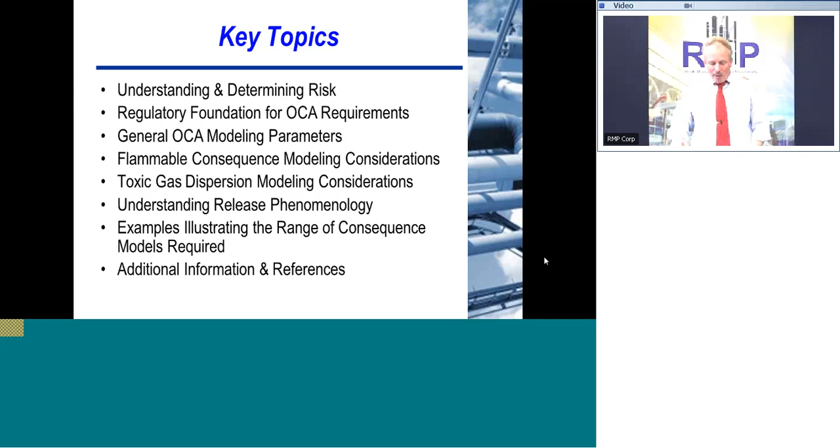Let's start by making sure we're all talking about the same thing when we discuss risk. Risk is really the product of probability and consequences. Likelihood by itself doesn't give you a complete picture. If something is very likely but relatively inconsequential, it's not that important to worry about. Something extremely high consequence but very unlikely may also not be that important to worry about. So it's by understanding both the likelihood of an undesired event and its consequences that we can understand risk and its overall importance in our lives and workplace.

When you're looking at engineered systems, you're really looking at a lot of different things that can happen for a complex process system. It's really the summation of all the individual probabilities and consequences for each of the undesired events that can occur.

One key concept to keep in mind is individual risk versus societal risk. Societal risk takes into account the number of people that may be affected by the event, whereas individual risk integrates the number of risks that an individual may be exposed to. Both concepts play a role in our understanding of risk and its quantification.

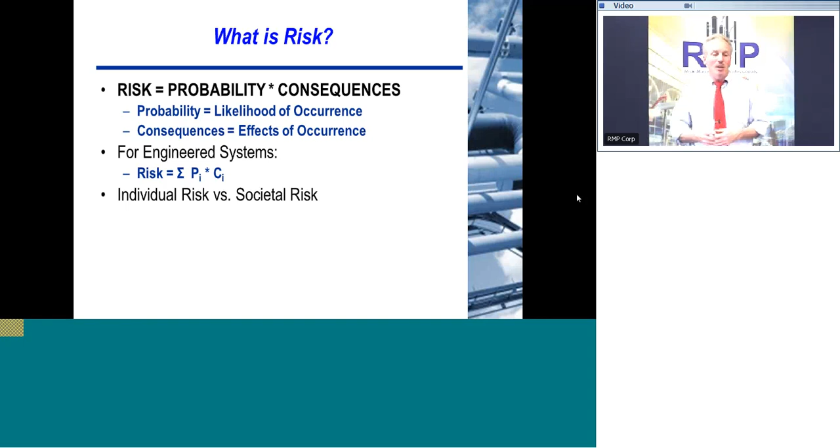Let's look at some different representations of risk. One of the most common is a risk matrix that might be used during a HAZOP study. On the left you'll see frequency, increasing upward. On the bottom you'll see severity, increasing to the right. People usually qualitatively assess these, though I've also put some numbers on this.

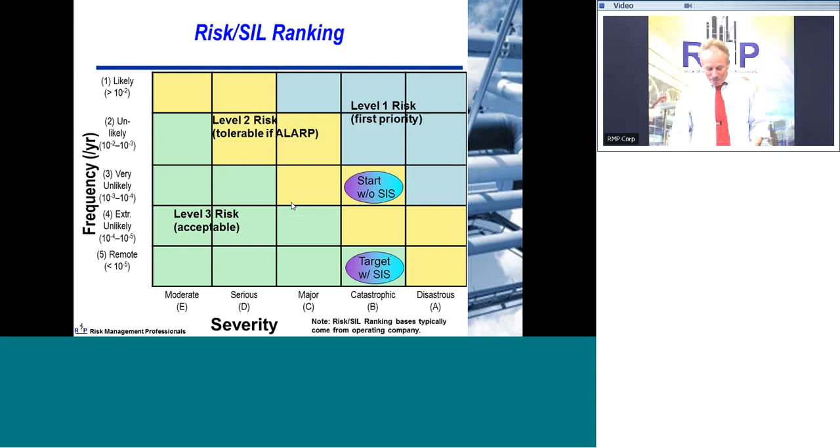Some might be a quantitative estimation in some cases, but basically you're qualitatively assessing this to get a general understanding. Is it high risk? Is it low risk? Is the risk acceptable, or totally unacceptable and something needs to get done right away? So really, likelihood and severity are two key components of risk.

When we're doing a HAZOP, the initiating event is often called a cause. In LOPA, it's called an initiating cause. Whether in HAZOP or LOPA, we're looking at ultimate consequences. In a HAZOP scenario we talk about safeguards; in LOPA we talk about an individual independent protection layer. It's by pulling all those concepts together that we get an understanding of likelihood, and HAZOP and LOPA are good tools for doing that.

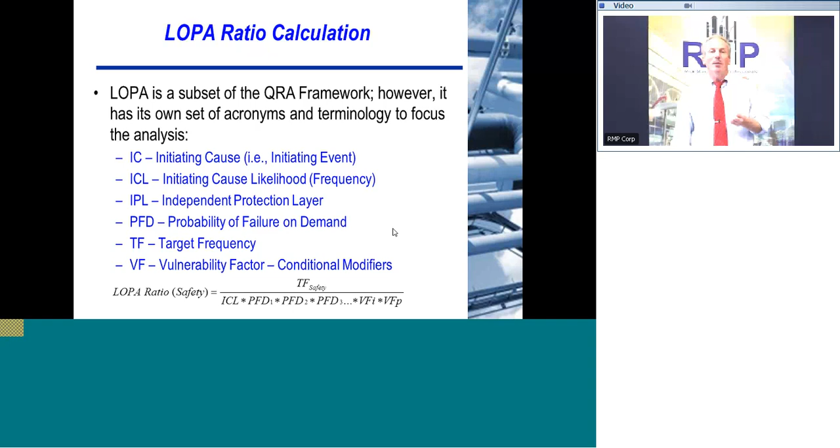The first thing to understand is the regulatory framework for consequence analysis. Why do you do it in the first place? Well, of course you want to understand risk, but there are also key requirements for facilities covered by the risk management program regulations, administered by the federal EPA or by state accidental release prevention programs.

Key elements when you're looking at all these programs put together: the first one is the hazard assessment, understanding how bad things can be, estimating potential release quantities, determining downwind effects, evaluating scenarios, potential exposure to populations, and also an accident history. This gives you a general appreciation of the magnitude of the hazard.

This is typically blended with the prevention program, of which a key element is process hazard analysis, along with an emergency response program in case things go awry and you have to deal with things that occur at the plant site. So those three key areas - the hazard assessment, the prevention program, and the emergency response program - work together to formulate the RMP.

Notice that one of the key elements is hazard assessment. More about that in a few minutes.

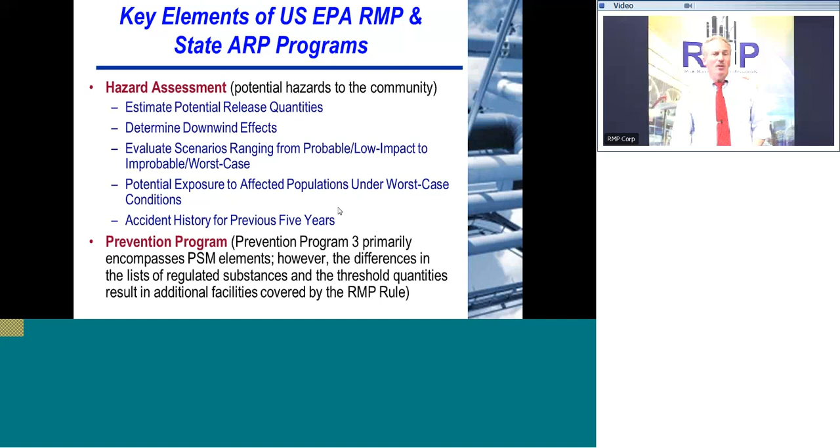When you're looking at the prevention program, it covers things like process safety information, process hazard analysis, operating procedures, training, mechanical integrity, management of change, pre-startup reviews, compliance auditing, incident investigation, emergency planning, employee participation, hot work permits, and also contractor safety. When you look at all those elements that formulate the prevention program, you'll notice that 5 of these are highlighted in red.

Those are key elements that people get cited on very frequently and are a key part of preventing accidents from occurring in the first place.

That process hazard analysis component is often implemented by a HAZOP study or other similar tools, along with perhaps layer of protection analysis for more severe scenarios. It's that understanding of what hazards can occur, coupled with consequence analysis, that gives you an appreciation of risk. The other elements of the prevention program help you implement it to prevent the risks from occurring, or at least to minimize them.

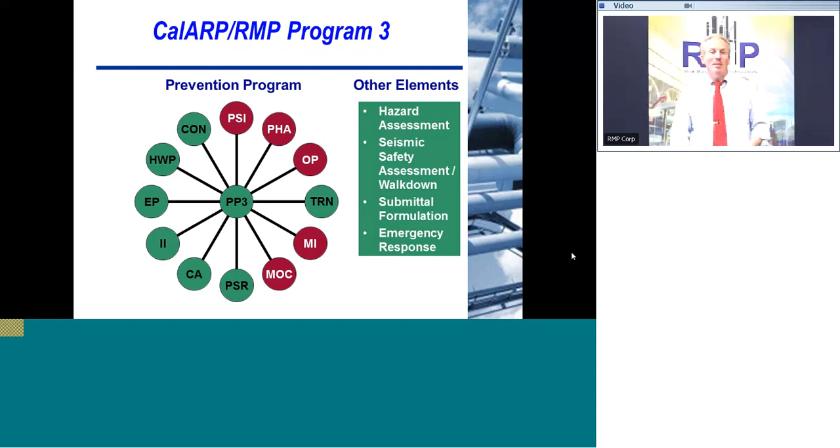So now you see how the big picture fits together with respect to how you evaluate likelihood, how it fits into the prevention program, how it couples with consequence analysis, and how these are all wrapped together as part of the risk management programs that you may have to do for your facilities.

When you do the offsite consequence analysis from a regulatory perspective, they really key on 2 items. One is a worst-case release scenario - basically the largest quantity of this acutely hazardous material, the substance being regulated, from a single vessel or process line, that results in the greatest distance to an endpoint.

We'll talk more about endpoints in a couple of minutes, but basically it's how far does it go before it can have a credible potential for severely injuring somebody.

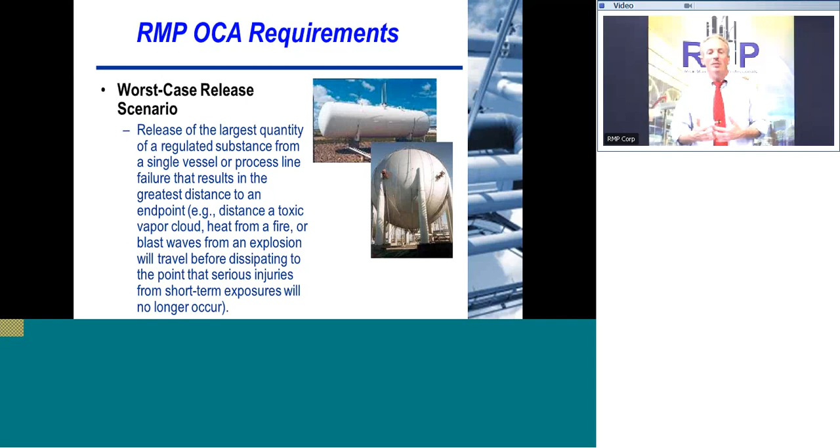The other main category required from a regulatory perspective is an alternative release scenario. This is more likely to occur - more frequent events, usually smaller in magnitude - but the EPA and your state ARPs want you to analyze a scenario that can reach an endpoint offsite, unless there's something that doesn't exist, which of course you'd want to justify. So those are the 2 key categories you look at from a regulatory perspective.

They do that so they can understand through the worst case analysis how important the facility might be in terms of protecting public health and safety.

The alternative release scenarios are things more likely to occur that you really should account for as part of your emergency response plan. So that's how that dovetails into your emergency planning process and the scenarios you choose for that and the ones you train on.

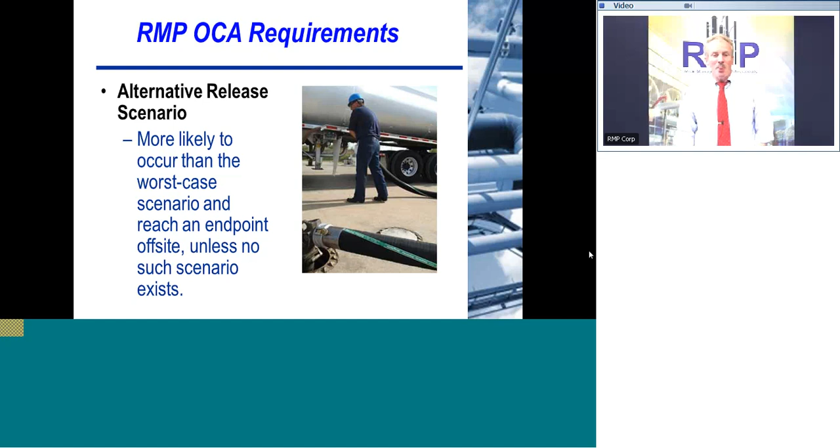Also, as part of the regulatory requirements, you've got to determine off-site population impacts. That's the key thing that the EPA, as part of its charter in protecting the public, and also your state accident release prevention programs, home in on as part of their charters.

They really want you to estimate the population within a circle of concern, or this radius of how far a release can go that can impact people, or how far the effects of a large fire or explosion at your plant site could impact.

Populations include residential, institutions, parks and recreational areas, and also if you've got large concentrations of people in commercial, office, or industrial buildings. Using the most recent census data, all these items are free.

If you're a practitioner or doing your own analysis, use the most recent census data. Also, population, when you estimate it, should be to 2 significant digits.

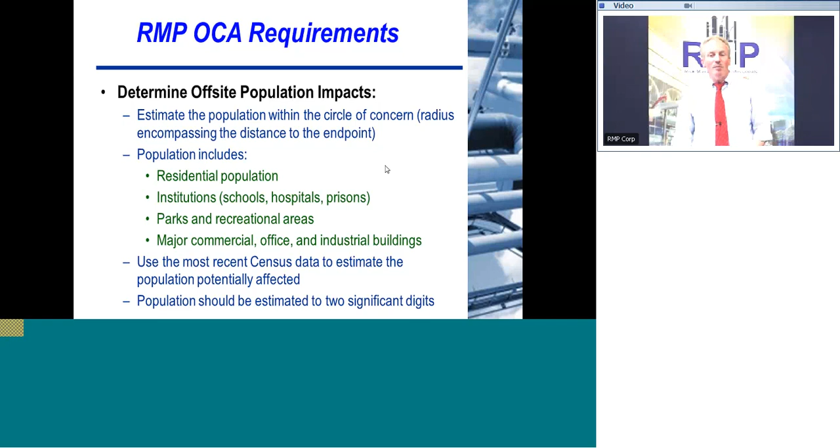Off-site environmental impacts, given the EPA's charter and also the state program charters, also require looking at environmental receptors within that circle of concern. Again, there's a variety of tools such as USGS maps and other data that can help you identify those receptors.

So those are the key reasons from a regulatory perspective of what you need to do and how you pull it together, and how that comes into play with respect to overall importance of risk.

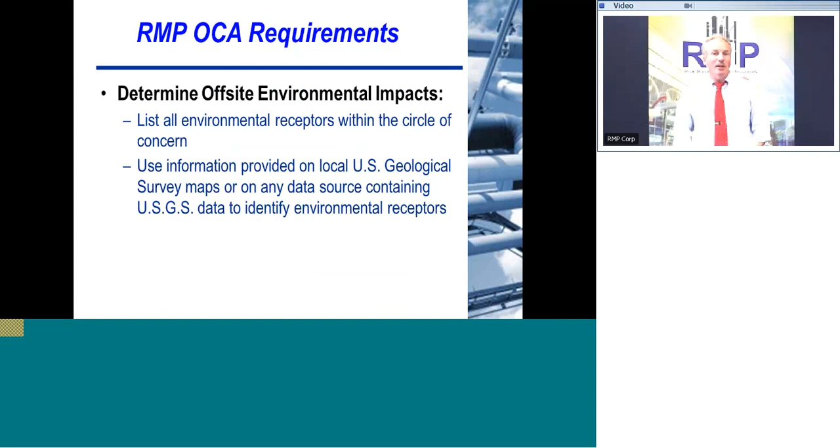As a HAZOP facilitator, and as somebody who helps clients identify the major potential scenarios that can have undesired consequences, you really need a basic understanding of off-site consequence analysis. It's important for helping you identify scenarios. Also, when doing a HAZOP study or other process hazard analysis, it can help you validate that the OCA scenarios are the ones to look at.

It can also help you identify alternative release scenarios. It's really important for the facilitator to understand the overall phenomenological issues, some basics of consequence analysis, how various impacts can affect population and plant workers, so they can understand the dynamic response to the scenario and properly identify the appropriate safeguards to apply.

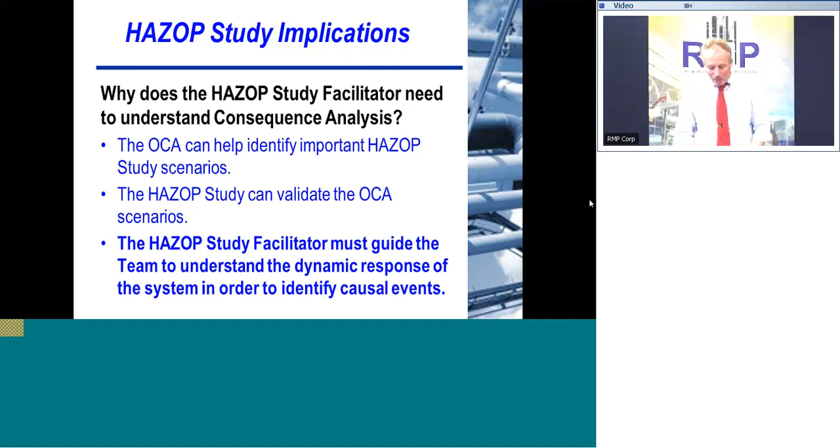So this is how it all fits together. Whether you're doing the consequence analysis from a regulatory perspective to meet requirements, or understanding consequences to help identify potential hazards, all these things come together in understanding the scenario, the likelihood of the scenario, and the overall consequences, so you can gauge importance and make definitive decisions on whether existing safety features are adequate or whether additional features need to be deployed or built into your system.

So let's talk about general modeling parameters and the big picture items you need to think about when doing consequence analysis. There's a lot of detail in these software packages, but by understanding the key driving forces and what really affects the results, you can simplify your work. You'll also have a much better understanding and a sanity check — if you get results out of the computer, do they make sense or not?

One of the key things that drive this is what's called, another buzzword, endpoints. These endpoints are different for toxic materials and flammable materials. For toxics, if you think about what people get concerned about with releases that can go off-site from an industrial facility, you're really talking about things that volatilize, have a vapor pressure, or are basically gases at ambient conditions.

Ammonia and hydrogen sulfide are two examples of gases that can affect individuals off-site. When looking at what can impact people, everybody's different and has a different response to chemical exposure — some people with health conditions or acute sensitivity can be affected at much lower concentrations, whereas very healthy people may not be affected much at all by concentrations others consider hazardous.

So toxicologists have established a median point, usually based on ERPG2 levels, for what concentration in air represents a hazard. For ammonia, the value is identified on the screen. Hydrogen sulfide, same thing. These are typically expressed in milligrams per liter, and are available as part of the RMP guidance on the EPA's website.

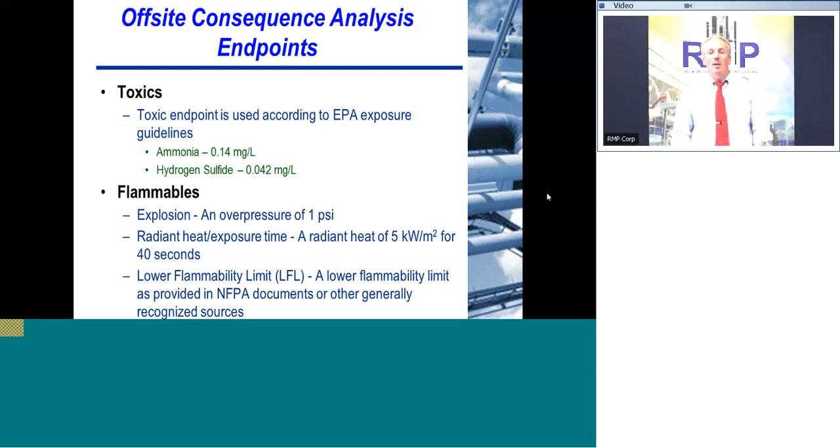So the endpoint is key for understanding the effects of a potential scenario that can have an off-site impact. Another factor is wind speed and atmospheric stability class — basically which way the wind is blowing, and whether it's stable or not. For a worst case scenario, you'd use a lower wind speed and a higher stability class, since more stable, lower speed conditions mean concentrations can build up at ground level where you'd expect people to be normally.

For alternative release scenarios, if you don't have meteorological conditions and data associated with that plant site, a higher wind speed and lower stability that's more representative of an average wind condition is allowed to be used.

From a regulatory perspective, they want to characterize the worst case scenario using the worst case wind speed and atmospheric stability class, whereas for alternative release scenarios, you're allowed to get a more reasonable or representative picture of what might realistically be expected to occur if you were to have a release. And if you're just trying to understand risk, you might want to get a wind rose to get average wind directions, and also use an average stability as appropriate.

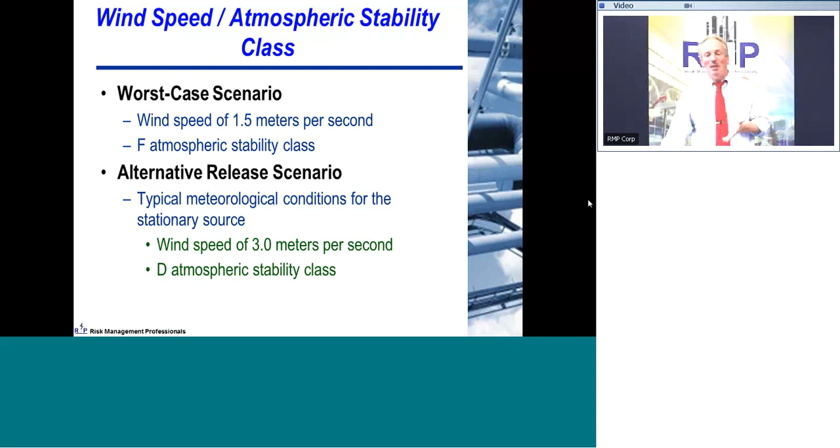Other key things to keep in mind when understanding the potential for offsite impact are temperatures, highest daily maximums. There's some guidance documents provided in terms of high temperatures and also humidity ranges. For alternative release scenarios, or if you're trying to do a risk calculation to understand potential risks, using more average or typical temperature and humidity data are more than appropriate.

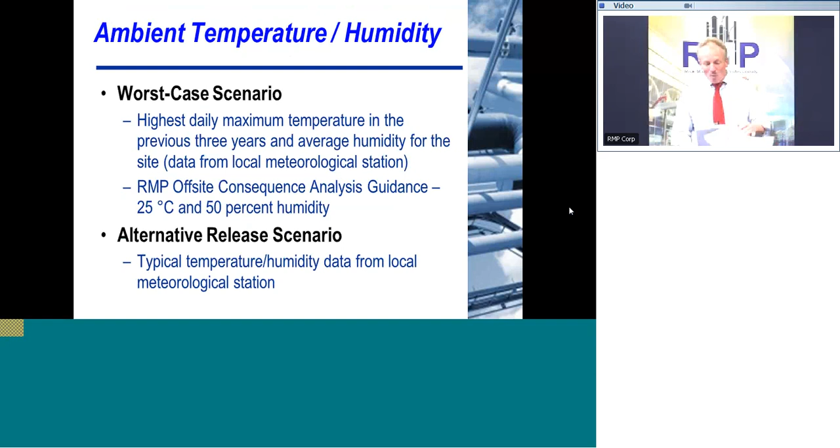Another key thing to understand potential impacts are terrain features. If you're doing a worst case scenario, you want to use characteristics associated with rural areas that allow the materials to go farther, unless you can justify an urban configuration where you've got more variations in the height of material close to the ground that breaks up the flow pattern of the release and makes concentrations ebb faster. So for urban characteristics, you're likely to get smaller endpoint distances of where you might impact the public, whereas rural, with flat terrain, it can go farther.

Now, both of these are assuming flat terrain. If you live in an area with lots of hills or a riverbed, you want to be very sensitive to the fact that if you've got a heavy gas release, it might hug the ground and actually go to low points such as riverbeds or between hills and build up higher concentrations there. If you wanted to get really fancy, there are high-end models that can help you do that. But the most important thing, whether you're at a plant site or a contractor helping a client, is to really understand the potential impact of terrain features, and in doing so, really understand if something can be an acute hazard or not.

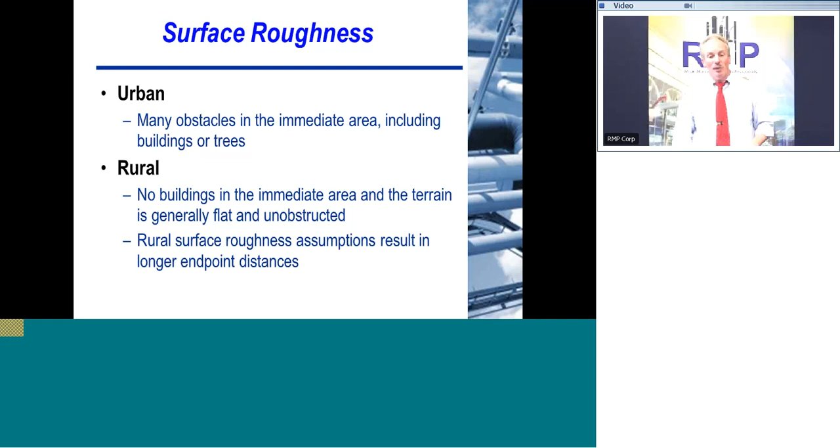Other things that need to be considered are mitigation factors. There are a lot of things that can help ameliorate the impact of the event. When you're doing analyses from a regulatory perspective, you get two main categories: the worst case analysis, and also the alternative release scenarios.

When you're doing worst case release scenarios, you can take credit for passive mitigation features, things like dikes, enclosures, berms, drains, sumps—things that are there, passive, not going anywhere, more or less a solid feature that doesn't have to change its state to have its mitigation effect. You're allowed to take credit for that for both worst case release scenarios and alternative release scenarios.

Now for active mitigation features, when your regulatory agency wants to characterize how bad it could be if there's a release from your facility, they don't want you taking credit for active mitigation features such as sprinklers, deluge, water curtains, neutralization systems, excess flow valves, flares, scrubbers, or emergency shutdown systems—systems that may require power or may require somebody to activate them. They don't want you to take credit for that because a lot of times you can't count on those.

So those are only something you want to credit for alternative release scenarios, or when you're trying to get a really good understanding of the scenario when you're trying to accurately characterize risk at the facility. Keep in mind the reason why you're doing the consequence analysis in many cases affects the kind of modeling that you do, the assumptions that you make, and you've got three main bases.

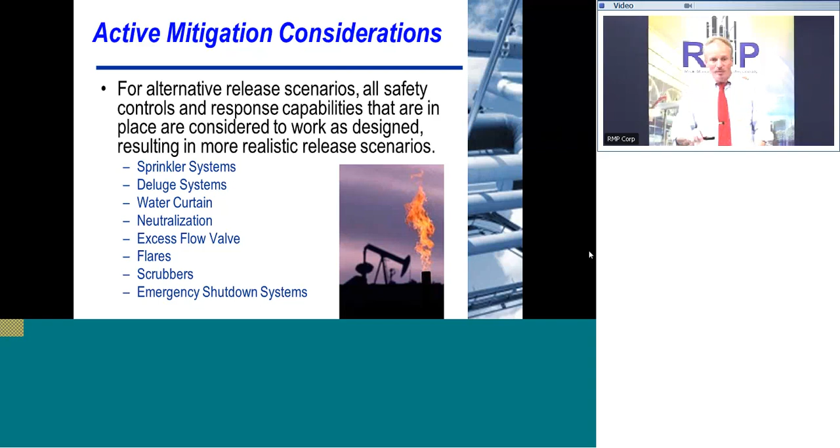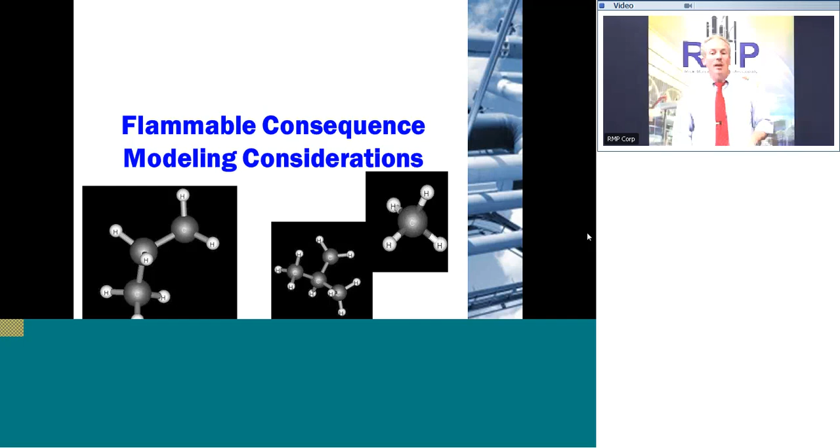Understanding the chemistry, understanding the phenomenology associated with releases and what happens to materials helps you better characterize risk, and also understand things if you're a HAZOP facilitator, understand the whole scenario and what represents reasonable safeguards or not. So let's talk about flammables first.

Basically, the key offsite impact potentials are overpressure and thermal radiation. How hot can it get? Can it start subsequent fires? Overpressure events, what kind of impact that might have on people or buildings or equipment nearby.

If you're trying to address this from a regulatory perspective, a typical state ARP program threshold and also the federal threshold and also for process safety management is 10,000 pounds. If you're below that amount in your system or storage, you're typically not encompassed by these regulations. If you're over that amount, you typically are encompassed by the regs and have to do all these consequence analyses to directly meet regulatory requirements.

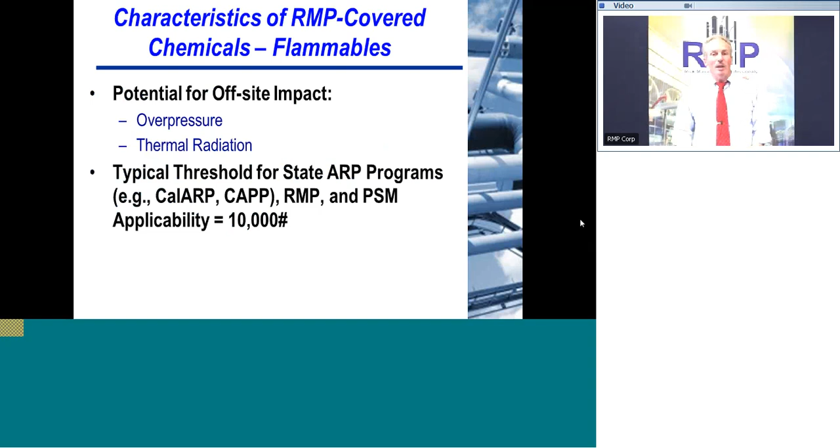Some things to keep in mind when you're trying to understand these various scenarios are different flammable materials have very different properties. I just took four common materials and put at the top hydrogen, methane, propane, and butane. From a molecular weight perspective and how they behave during a release, obviously hydrogen being one of the lightest, butane being a lot more heavy in terms of things that can volatilize, form gases, and go off-site. Very different boiling points. All in this case under standard temperature and pressure conditions are gases.

When you're looking at dispersion characteristics, however, hydrogen and methane have a lower molecular weight than air and will typically be buoyant, again very temperature dependent - we'll talk about that in a few minutes. Propane and butane typically behave as heavy gases. They have a higher molecular weight than air, and again, depending on temperature, would typically behave as a heavy gas. All these things are temperature dependent.

Even something that has a lower molecular weight than air, such as ammonia, often behaves as a heavy gas because when it gets released, as it transitions from a liquid to a gas, it tends to transfer heat to the environment, and it picks up heat from the environment, and it's a much cooler material, so it behaves as a heavy gas. Propane and butane, if they're hot enough, will also behave as buoyant gases too. So again, you want to look at temperature and the chemical properties when you're deciding what can happen during a release.

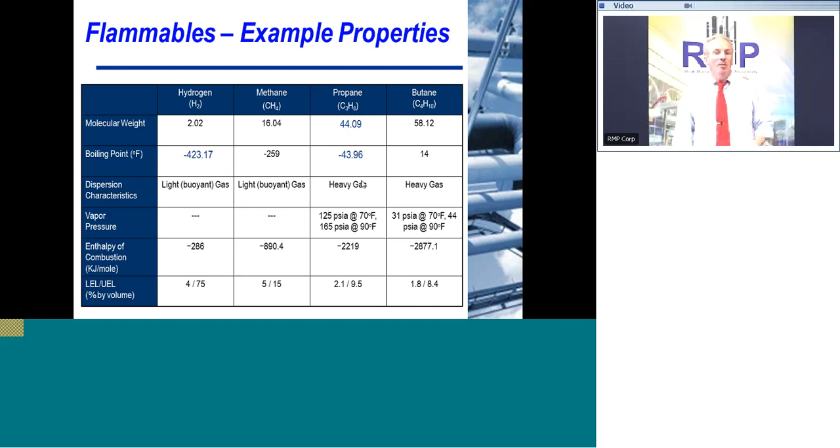Some of these things are just for your reference, I'm not going to go through this table, but I pulled this from one of the CCPS guidebooks on quantitative risk assessment. This is a table of the kind of damage effects you might get from a certain pressure potential resulting from an explosion or deflagration.

At the bottom of this page, you'll see the 1 psi level, partial demolition of houses. Basically, they're made uninhabitable. This is one of the reasons why the 1 psi threshold is used for your endpoint, for determining endpoint distance for flammable materials. The degree of destruction is pretty significant, and it can have a big impact on nearby homes or businesses.

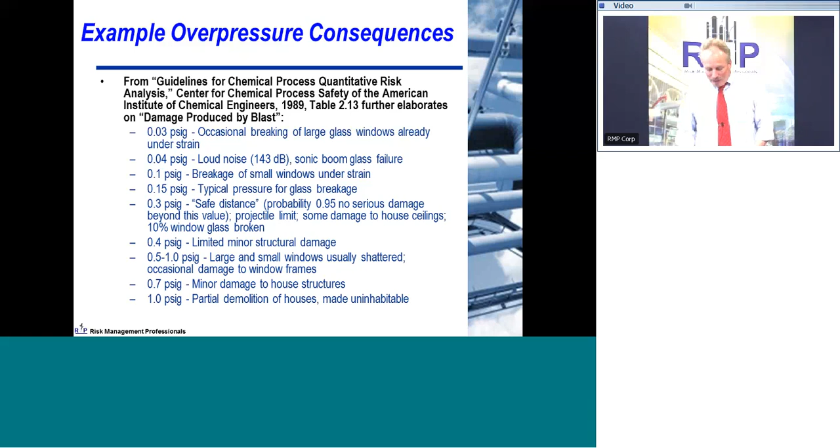So let's talk more about release phenomenology. You've got to keep in mind for flammables that fires and explosions need fuel, oxygen, and energy or an ignition source. You need all three elements to really have a problem.

When you're doing regulatory-based consequence analysis, you've got to assume that a flammable material finds an ignition source, and a certain amount of it converts to energy, which gives you an endpoint distance based on that 1 psi threshold. When you're doing a more realistic model, there's other things you need to consider.

Keep in mind that there are a lot of conservatisms built into these worst-case scenario models. Finding oxygen, finding an ignition source, that may not be possible for certain types of releases. Not all the cloud will be in the flammable range, and if it's not, it typically would not ignite and not participate in the energy associated with the deflagration or explosion.

For a vapor cloud explosion, typically there's a 3% yield factor. That's much more realistic and much lower than the 10% of the cloud that would be assumed to participate in the explosion for a worst-case release scenario.

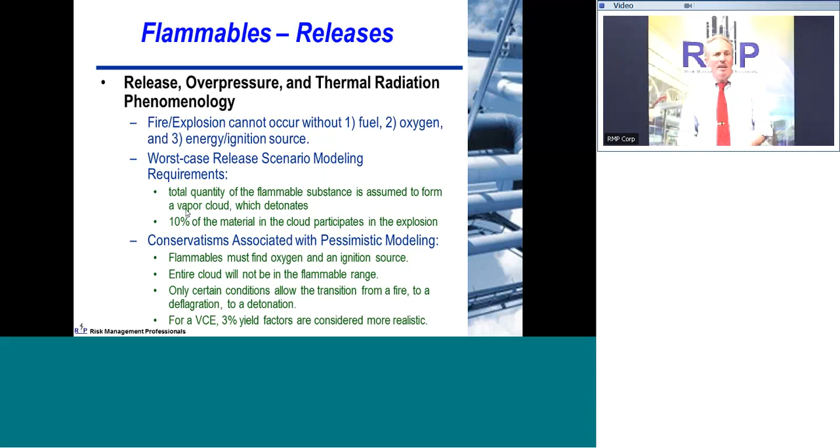So if you're doing a realistic assessment of this or trying to understand scenarios, these are things to keep in mind. Whether you're looking at toxic releases or flammable releases, they're typically superimposed on a map, and you draw circles around the various overpressure impacts. In this particular case, you've got different endpoint distances for 1, 3, and 5 psi.

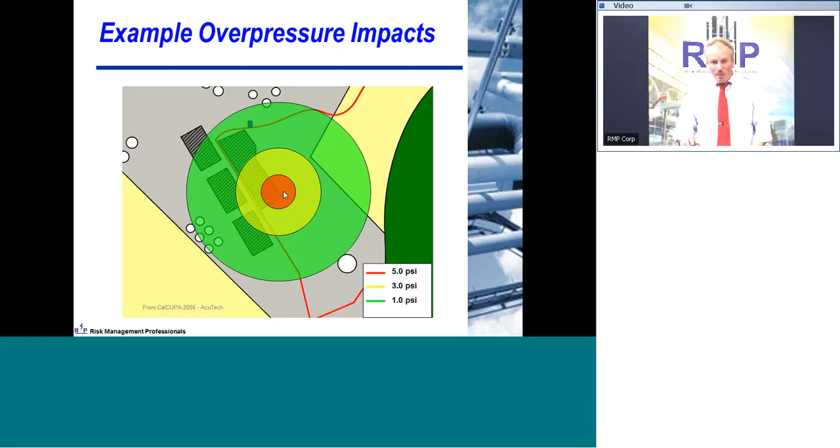So let's talk about toxic gases. A lot of the acute impacts are associated with toxic gases that may be used at a variety of industrial facilities scattered throughout your area, and also in a lot of urban areas that have a lot of housing too. When you're looking at airborne toxics, they're categorized like that.

They're on the EPA's list if you have to worry about regulatory requirements for their potential for acute health effects. Typically, they're going to be a vapor at ambient temperatures or standard temperature and pressure. However, in a lot of cases, small particle solids may also be encompassed by some of the state accidental release prevention programs. When you're looking at acute toxics, typically you want them to be a gas at room temperature, because if they're not a gas, they're typically going to stay on site unless they're a small particle solid.

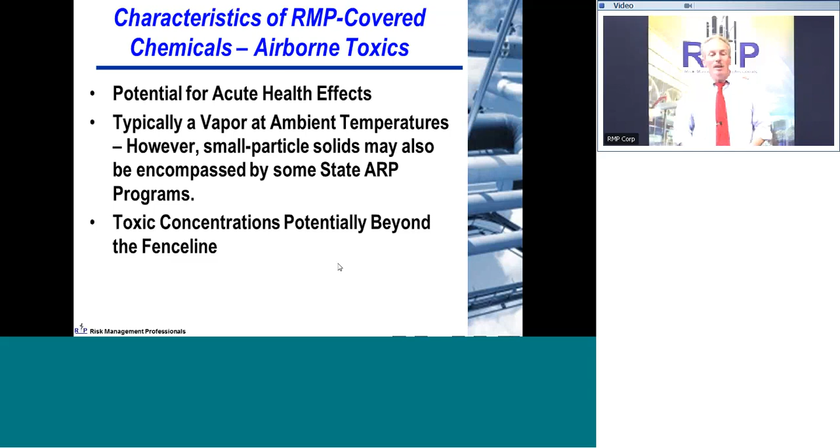When you're looking at these sort of things too, you're going to look at things that are highly toxic and can cause toxic concentrations potentially beyond the fence line.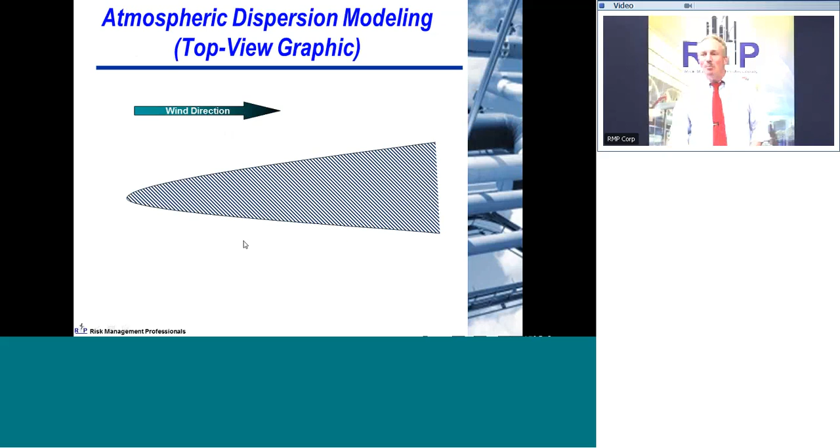Now, there's also gravitational effects because it's a heavy gas. It gets carried by the wind, direction to the right on your slide, and as it slumps, it tends to widen some more, and because it's heavier than air, it can actually travel upwind. This is a phenomenon you have to be concerned about if you're an emergency responder, or a person at a plant site trying to control a release. If you're dealing with a heavy gas, it can go upwind as it spreads out, depending on wind velocity, for low wind conditions.

Then as it goes downwind, it tends to spread more. When you're thinking about these things, recognize they're spreading both horizontally and vertically as the gases are dispersing. That's why you see, as it goes to the right, these lines going up on your screen. Also recognize that as it spreads out more and more, eventually it gets to the point where it's really not above the endpoint where it can cause toxic effects.

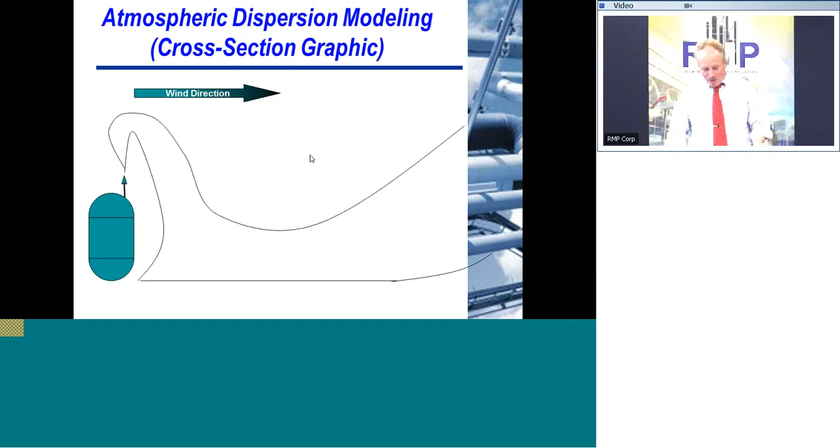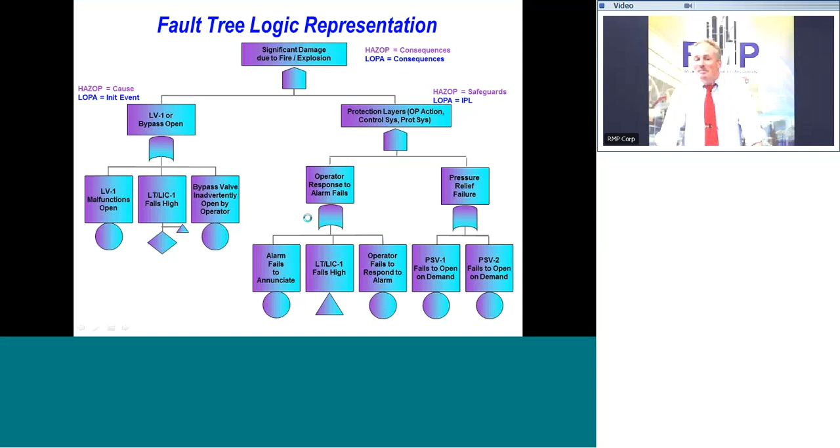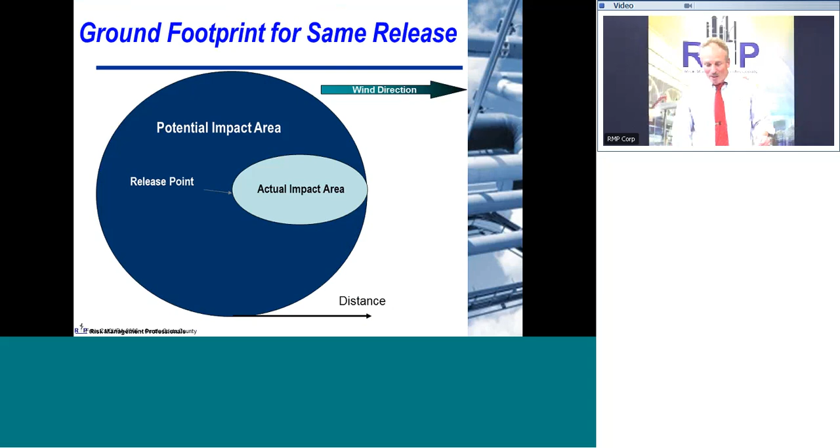Okay. How are you doing over there? Okay, I need to restart. You may have to do the same thing. Okay. Good. It should go up here. Did you restart? Yes, that's what I just did. All right. Mm-hmm. How you doing? All right, good. Are you here? Huh? All right, great.

All right, so after we've looked at some of the key things that can go on with respect to your offsite impact, what I'd like to do is talk about some of the other things that can occur in general understanding of release phenomenology when you're having realistic releases.

Basically, an understanding begins with understanding chemical properties. The phase at ambient conditions, whether it's a gas, liquid, or solid, is critical. As I mentioned before, things that tend to be gases at standard temperature and pressure are usually things that become more of an acute concern from a risk perspective, because if they weren't a gas, they typically wouldn't cross the boundaries of your plant site. Liquids can cause an environmental impact and can certainly cause pollution concerns, but often those are things that can be cleaned up. If you release a toxic gas at your facility, it's typically not going to be something that you can mitigate very easily. So what you have to do is understand the risk, do the consequence assessment, and make sure you have a prevention program that's robust enough to control things and keep things from going off-site.

In this little example here, a lot of times you can have a vessel that's under pressure, maybe even liquids in the vessel, but the material, the chemical in the vessel wants to be a gas at atmospheric conditions and at standard ambient temperatures. So if it's released and it goes into a dike, typically it's going to volatilize and get released.

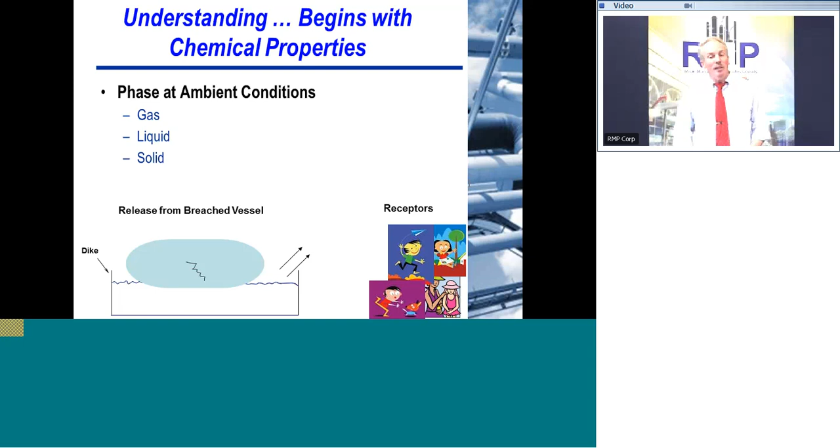Also, when looking at release phenomenology, the fire diamond is actually very helpful in terms of understanding general release characteristics. Typically, the NFPA diamond, you've got blue for health, red for fire, yellow for reactivity, and white for other kinds of hazards. It gives you the general degree of toxicity, flammability, reactivity issues, and a general understanding of how dangerous the material is in terms of a potential for release, and then effects if it does get released.

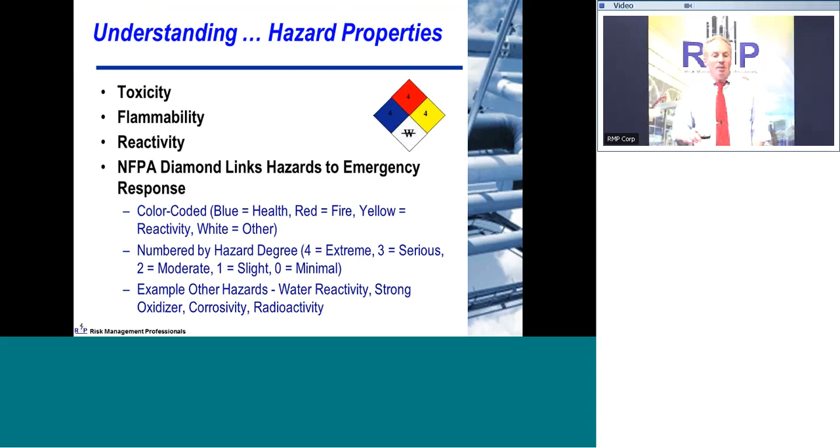Understanding process conditions is also super helpful. If something's at high temperature, especially a liquid that's in a superheated state under temperature and pressure, if it's released, it will volatilize into a gas and go off-site. Those are critical things to understand of the various release characteristics.

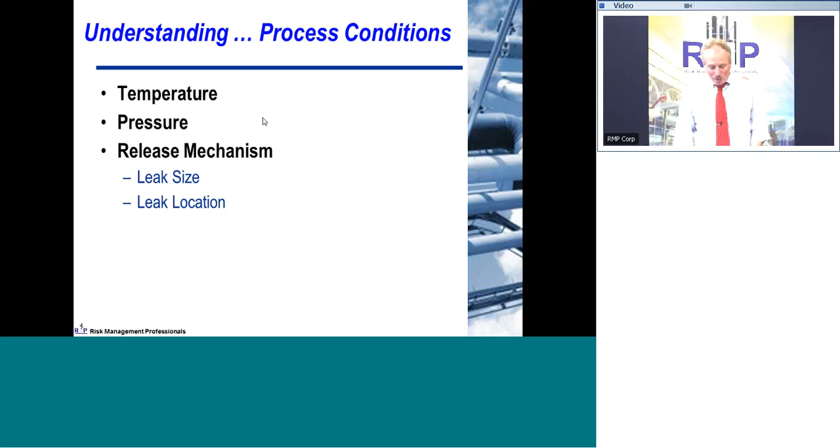Also, the release mechanisms, the size of the leak, location. If you get a vessel and you get a breach in the vapor space of the vessel versus the liquid space, it can behave very differently. In the vapor space, you may get a slower release, in terms of the total mass released, equivalent to a similarly sized leak. If it's below the liquid level, you may get material that comes out, and you'll get more mass release, but it might tend to puddle and then volatilize.

One of the classic characteristics associated with this is when people talk about a chlorine freeze event. I've heard that term used quite frequently. Basically, people use that when you get a breach in the vapor space of a vessel containing liquid chlorine, and what happens is the vapor comes off, taking the higher enthalpy material off the top of the liquid surface. More liquid volatilizes, converts to gas into that vapor space, and then goes through the vapor release. While it's doing that, it's actually cooling down significantly, and the liquid itself becomes cooler and cooler as part of an auto-refrigeration effect, and basically it'll stay as a liquid at very low temperatures and gradually absorb heat from the environment. So this chlorine freeze, from an emergency response perspective, was a term often used to describe the fact that you're getting a pool of liquid in the vessel, so it really slows the release down significantly.

So understanding where the release is, the various characteristics of the process associated with it, can really help you understand the phenomenology associated with the event and overall risk.

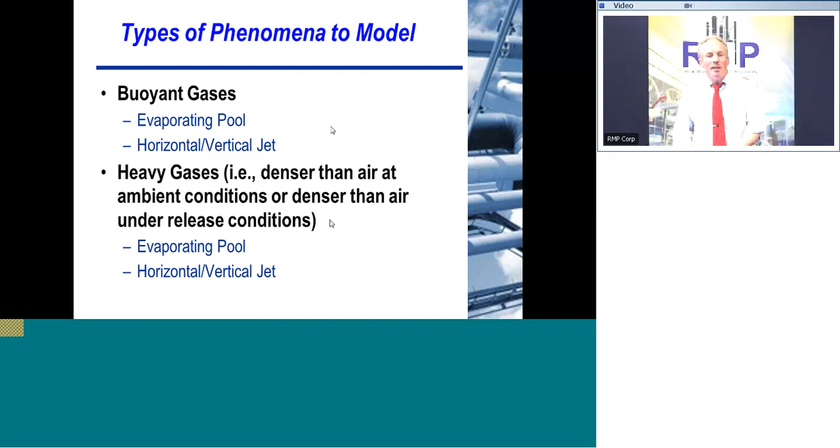Other phenomena that need to be modeled may be pressurized liquid releases, liquid spills of a pure substance, solution spills, vapor cloud fires or explosions, pool fires, particulate releases, reactive chemicals, or chemical interactions with water vapor. All these different types of phenomena, if you're doing an accurate software calculation, may need to be part of that software model, or at least part of your understanding if you're trying to understand risk and some of the key things that may drive the magnitude of consequences for a release.

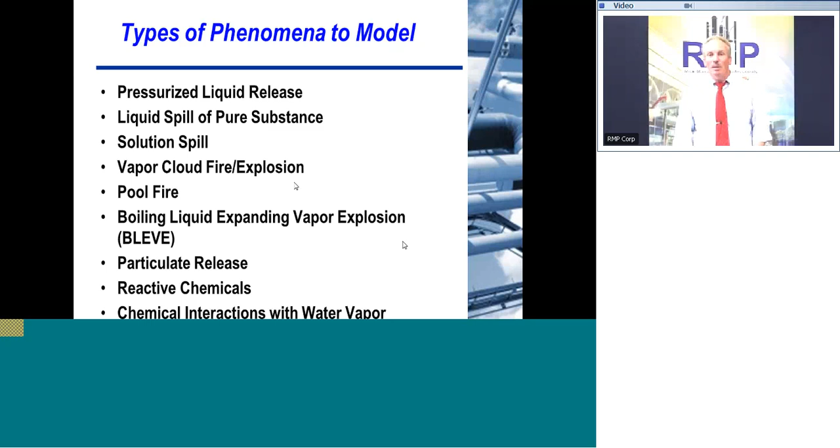On this slide, I've identified a lot of the common software packages that are out there. RMP Comp is a freebie that comes from the EPA, a very simple model. And SLAB, Aloha, Screen 3, DEGADIS, PHAST, Archie, and various CFD models are more advanced and can be used by the practitioner in understanding the conditions. They're all good within certain release conditions and certain types of chemicals. So you want to know what you're modeling, what chemicals are involved, and what range of characteristics the software is good for.

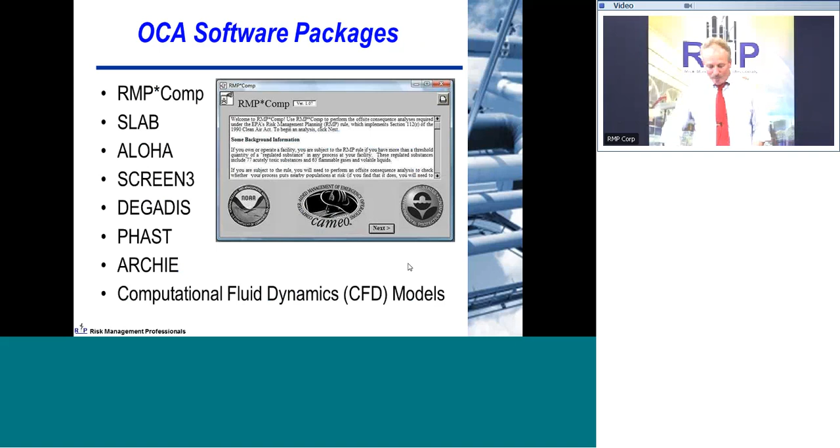Okay, so now that I've identified a lot of the key things to keep in mind with respect to consequence modeling and consequence assessment, a lot of the key software packages that are out there, and the key things you want to keep in mind when understanding the release phenomenology, I wanted to give you a couple of examples illustrating the range of consequence models required.

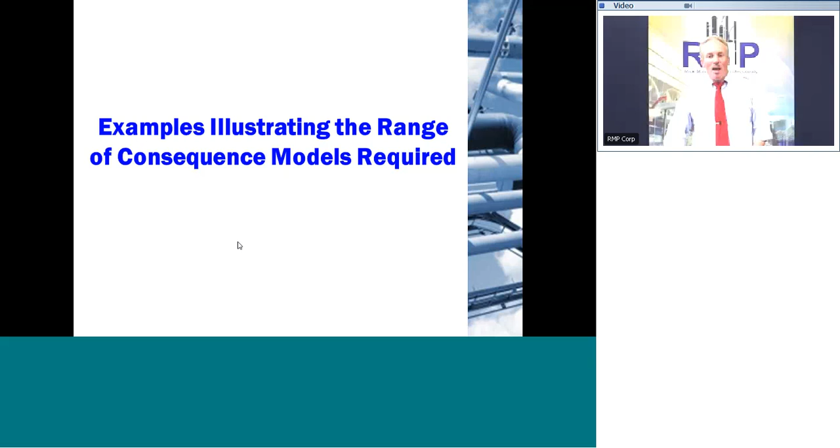First of all, I'd like to focus on a very common material used in a lot of different processes, and that's ammonia. You're all familiar with it. It's a colorless gas, quite odoriferous, very pungent. It's got a strong base. It can be highly hazardous. It reacts with people very readily and can have very acute health effects. If it's inhaled, it can have very serious respiratory effects.

Its high thermodynamic efficiency makes it a very attractive material to use in ammonia refrigeration. So very common uses are ammonia refrigeration, pesticides, and other chemical processes. One of the key things to keep in mind is in confined space conditions, it might also have potential for explosion if it's in high concentrations, often between around 16 and 25% in air.

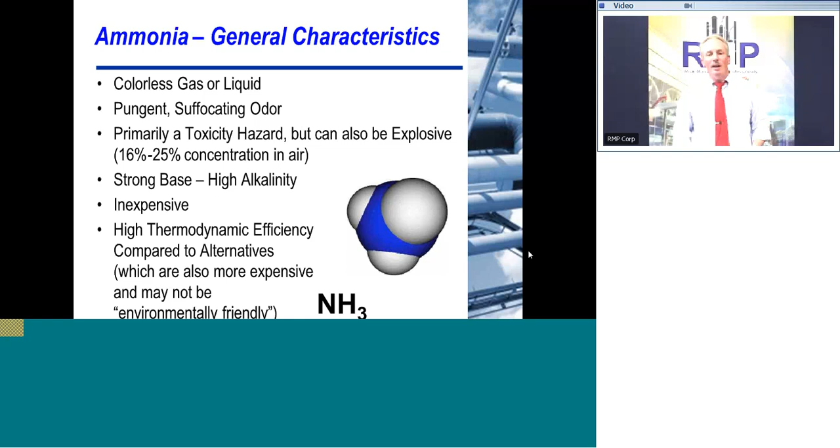When you're looking at ammonia, it's considered relatively non-flammable. Again, you have to be in a confined space and within a very tight concentration range. It has very serious health impacts, and it's not highly reactive with a lot of materials like steels and other containment items that are out there.

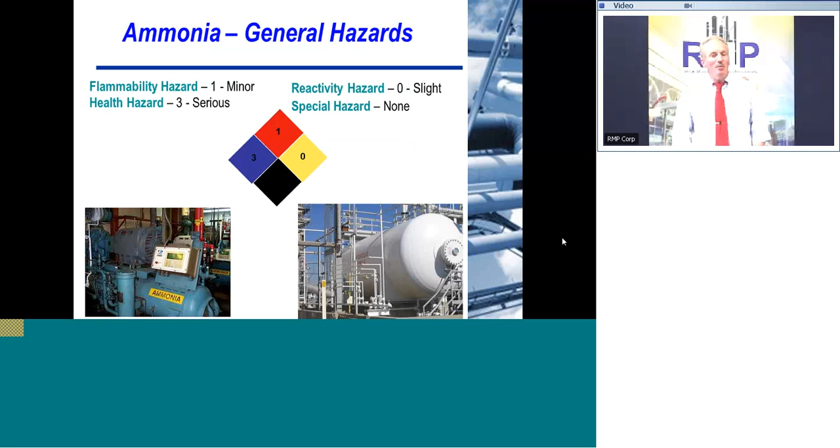Other properties to keep in mind: it has a very low boiling point. It also has an affinity for water, readily dissolving in it. It's got a relatively low molecular weight. When it disperses, because of its auto-refrigeration capabilities and high latent heat of vaporization that make it a very effective refrigerant, it tends to cool significantly as it's vaporizing and behave as a heavy gas when released.

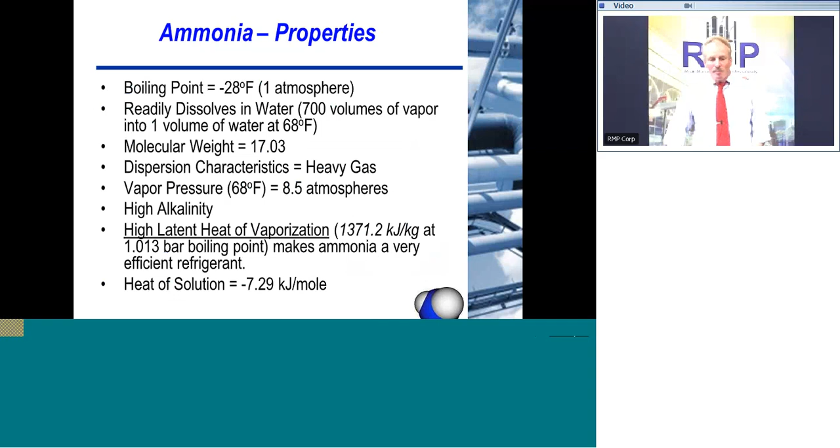So when you're looking at ammonia, it can have a lot of different characteristics over a very wide range, behaving as a low molecular weight gas that behaves as a heavy gas initially and transitions as it warms up to ambient conditions into a buoyant gas. It can also build up very high pressures in processes, and it also has a very high affinity for water, and a high latent heat of vaporization, which makes it a very effective refrigerant, and it also significantly affects its release characteristics.

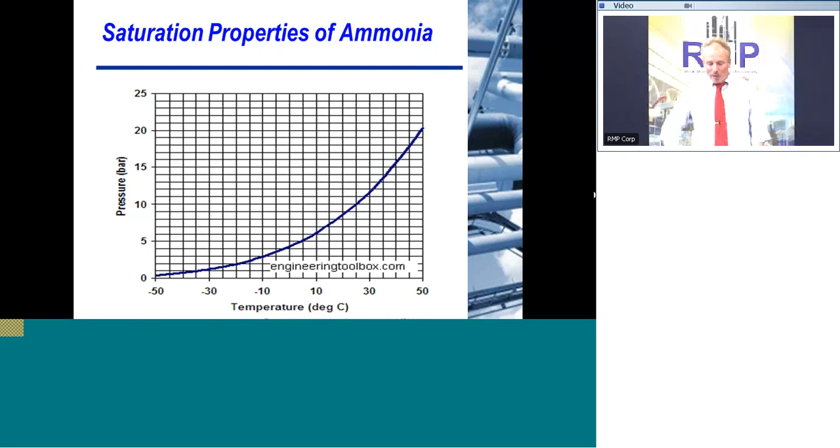When you're looking at release phenomenology, it can often be visible when released in air due to condensation of water. You're often getting a two-phase release, coming out in droplets. The droplets increase the overall density of the release and convert slowly to vapor, keeping the plume cool and low to the ground, allowing it to behave as a heavy gas pretty far downwind.

It's very tempting to want to throw water on it if you're an emergency responder. A lot of times emergency responders want to use a fog mechanism to knock down vapors, basically using the fogging mechanism to absorb some of the hazardous vapors from the air. That may be a very effective mechanism for knocking down vapors. But if you take that a step farther and start applying it to a liquid pool of ammonia, you transfer heat into that ammonia pool. Even though you're diluting it a little bit, which is good, you're putting heat in rather rapidly, and you're going to have a rapid volatilization of the liquid ammonia in that diked area.

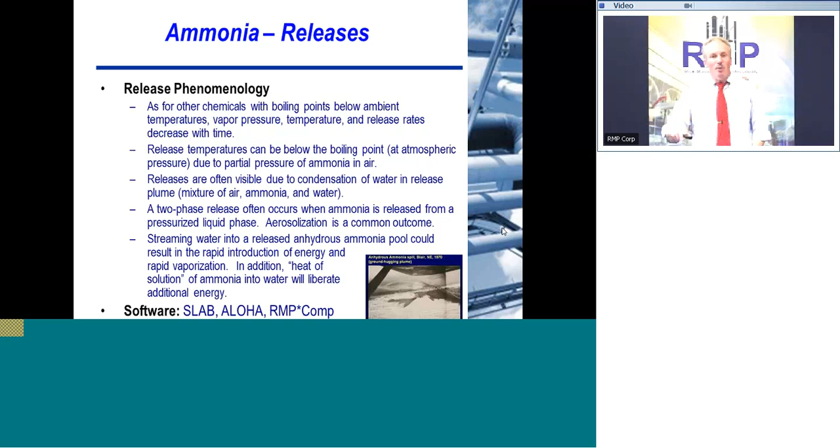Now let's talk about aqueous ammonia. Aqueous ammonia is basically ammonia in a water solution. A lot of people refer to it as aqua ammonia or ammonium hydroxide. It's often sold in a concentration below the requirements where the EPA considers it a highly hazardous material and wants to include it as part of a risk management program.

When you're looking at general hazards, you're not really concerned so much about the aqueous ammonia unless it gets on the skin or you have some sort of contact with it. The primary hazard when looking at off-site effects is the ammonia vapor that comes off, and it's the same kind of toxicity issue associated with the anhydrous ammonia I just discussed. Of course, aqueous ammonia is also highly alkaline.

As I mentioned before, ammonia's got a lot of different uses. Anhydrous is good for refrigeration systems, good for fertilizers, good for a lot of different chemical processes. It's also good for selective catalytic reduction and pH control. Aqueous ammonia has a lot of use for selective catalytic reduction in terms of NOx, reducing NOx emissions from power generation stations, and also for pH control.

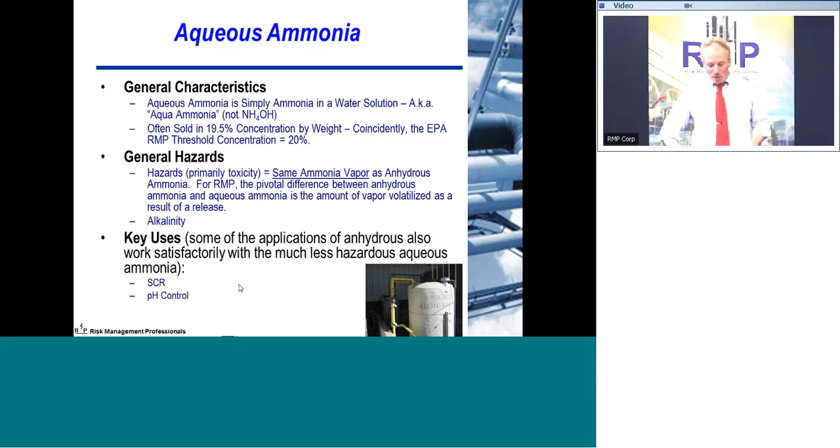When you're looking at aqueous ammonia releases, understanding the conditions of the process helps you really understand what happens if it's released. If you get an anhydrous ammonia release, you may have to worry about cooling effects, auto refrigeration, heavy gas modeling, transitions to buoyant gases, two-phase releases, and a lot of different things that might go on.

Aqueous ammonia is a lot simpler with the vapor release, but keep in mind that several different things are happening. If you get an aqueous ammonia release in liquid form, typically it'll come out as a liquid, pool if it's in a contained area like a dike, and then you're looking at vapors coming off. So when trying to model this, you have to model how much liquid is coming out, the vapor pressure off the surface of the liquid, then once the ammonia goes airborne, how does that disperse downwind.

The nice thing is, because it's lower molecular weight than air - around 17 for ammonia and around 29 for air - it's typically going to behave as a buoyant gas. So you'll need a couple of different models: understanding the vapor pressure, how much comes off out of the solution that was spilled, and also looking at the dispersion of ammonia vapors.

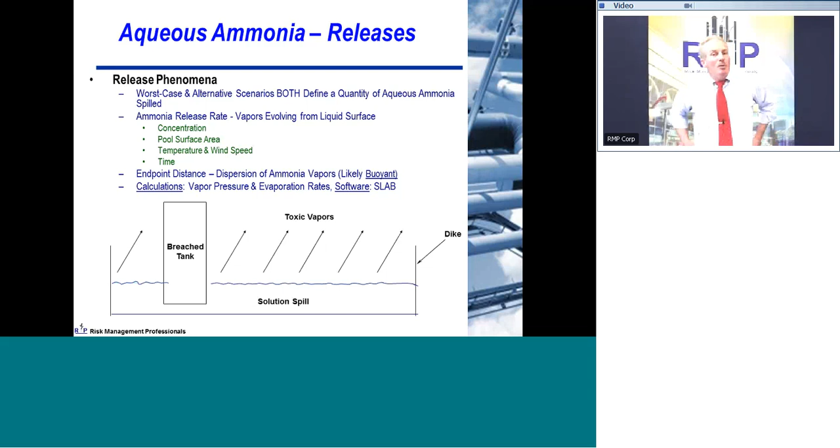Good software packages for that: Slab does a good job, Aloha also does a good job, RMP Comp does okay, but it tends to overpredict the consequences associated with the release.

The next page has a table that I'm not going to go into a lot of detail on, other than to illustrate that when you're looking at an aqueous ammonia spill, vapor pressure really drives the consequences. Vapor pressure goes up significantly with solution temperature and also with concentration.

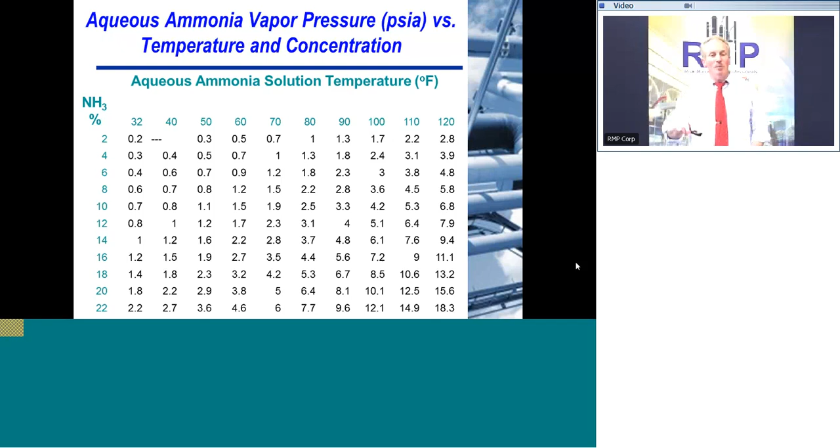These are things you definitely need to keep in mind when considering an aqueous ammonia spill. Also, to reduce the amount of material evolved from an aqueous ammonia spill, a lot of folks will use a catch basin—a fairly deep area that can take a solution spill and minimize the surface area. That does significantly decrease risk, even though using aqueous ammonia in the first place, for NOx control or pH control, is already a big improvement in lowering risk and having a more inherently safer design.

The catch basin can prevent vapors from ever reaching your endpoint concentrations or toxic thresholds off-site. A lot of people use that not only to lower risk, but also to limit the potential for being included in state accidental release prevention programs, by making it not credible that it builds up toxic thresholds off-site.

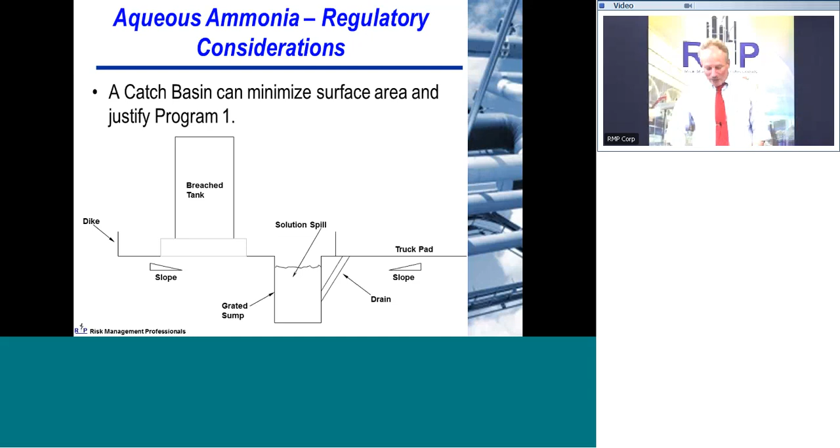We talked about anhydrous ammonia releases, what happens if you get a breach, and the heavy gas characteristics. We looked at aqueous ammonia releases, which involve totally different phenomenology that need to be modeled. It's worth mentioning for a few minutes what happens with ammonia piping.

This has been a fairly common problem for refrigeration facilities and facilities that use anhydrous ammonia: if you block in a section of piping that starts at cold conditions and starts warming up to ambient, especially if impacted by sunlight, you can get a lot of heat put in there. A lot of people have underestimated and really don't understand the magnitude of the potential pressure buildup in that blocked-in section of piping.

What we did is something to help illustrate the magnitude of that, and the fact that you can build up several hundred psi in that blocked-in section of piping, by thinking about what ammonia is actually doing and understanding the chemistry of what's happening.

Ammonia, like all fluids and most materials, tends to expand when heated. The fluid is somewhat compressible, but it's surrounded by piping, often steel piping, which has certain limits in terms of how strong it is. The amount of stress put on the piping depends on how thick the piping is too. So if you're looking at ammonia blocked in and heating up, that ammonia wants to expand while the pipe doesn't expand as fast, which means you get a lot of wall stresses built up, reflected as actual tensile stresses in the side of the piping.

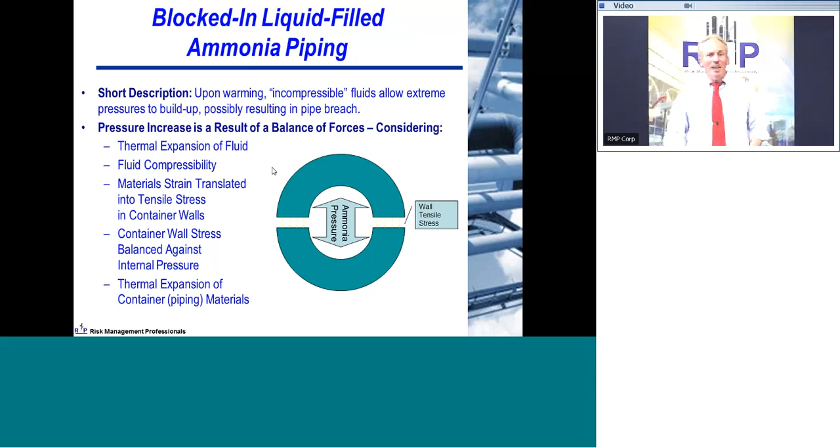There's a handy equation for that if anyone wants to look into it. It basically shows that the pressure buildup, or differential pressure, is the difference between the volumetric coefficient of thermal expansion of the fluid and of the vessel itself—the fluid trying to expand faster than the vessel. It's related to the change in temperature, compressibility factors, and it's inversely related to the thickness and the elastic modulus of the vessel or piping materials.

These are things to keep in mind, and this is why you get significant increases in pressure as the temperature of a blocked-in section of piping increases. Again, understanding chemical characteristics and phenomenology are super important.

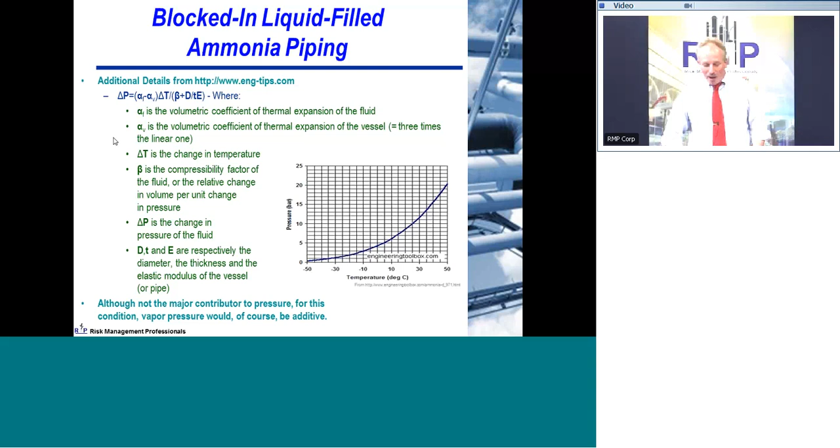What I'd like to do is very quickly show another side of the coin with respect to small particulates and what can happen. We've looked at ammonia, which has heavy gas release characteristics, and aqueous ammonia, which has buoyant gas characteristics. Small particle solids can also, if dispersed at the plant site, have a potential off-site impact.

Things with small particle sizes can go up in the air, get carried with the wind, and being able to model that and look at the general hazards may be a requirement for people who use these kinds of materials. Cadmium oxide, various cyanide materials like sodium cyanide and potassium cyanide, are often fairly small particles, and you've got to look at what the wind is doing, particle size, and the density of the particles, and how much reduction factor you get in the air.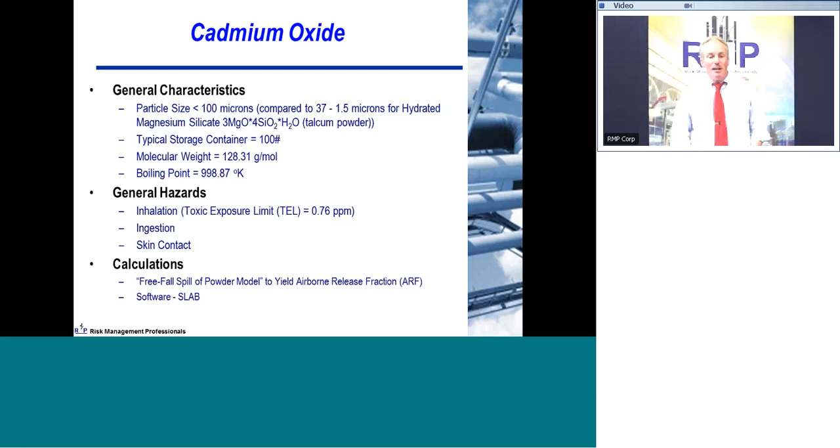When you're looking at release phenomenon, you can get a drop effect that causes a puff of material that wants to travel downwind. That may also need to be modeled. A lot of common software models can handle this when you treat it as a combination of a gas, looking at boundary conditions as a gas that's dispersing if the particle sizes are small enough, coupled with the airborne release fraction based on the weight of the particle.

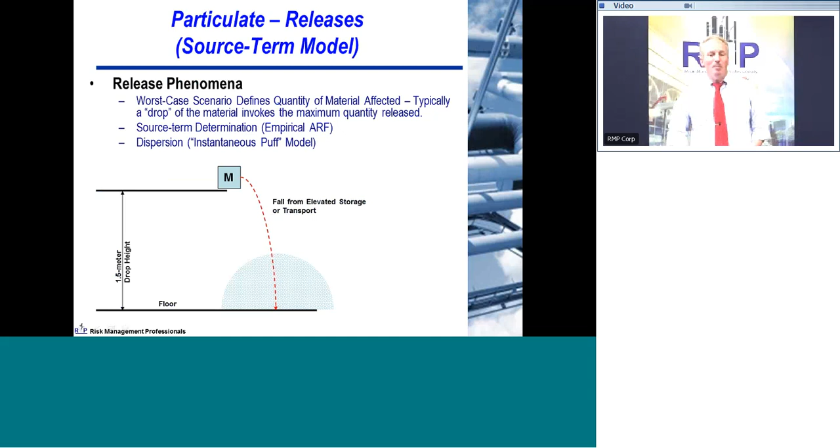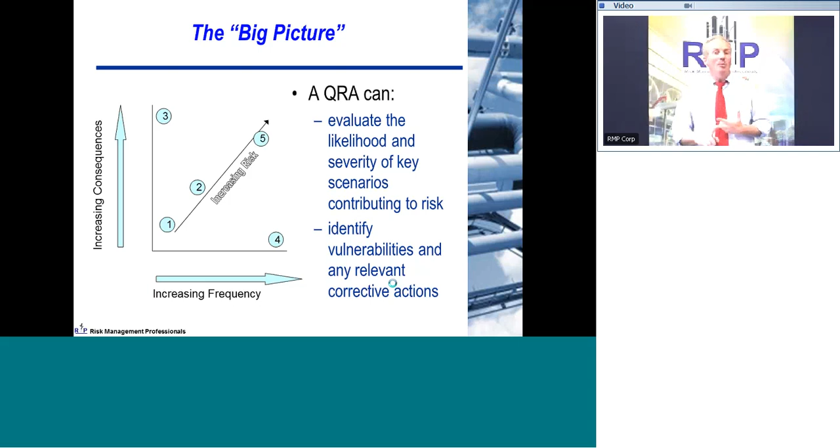So what's the big picture? When you're looking at risk, you want to understand both frequency, which you get out of a process hazard analysis or HAZOP study, and also the ultimate consequences. Those consequences come out of a consequence assessment when looking at a gas release, and by understanding both of them you can get a better appreciation of risk. Both are critical things to keep in mind when controlling risk at your plant site or dealing with the various regulatory requirements associated with RMP.